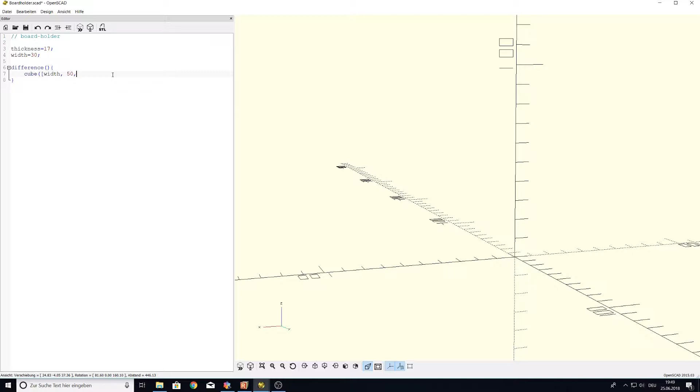We want it to have width of 3 centimeters. We'll make it 5 centimeters deep and 8 centimeters high. We hit F5 and then we already get the preview.

Now what we want is we want to cut out the skateboard, as I told you already. Therefore I measured it and it's approximately 50 centimeters long, 15 centimeters wide, and has a thickness of 1.7 centimeters.

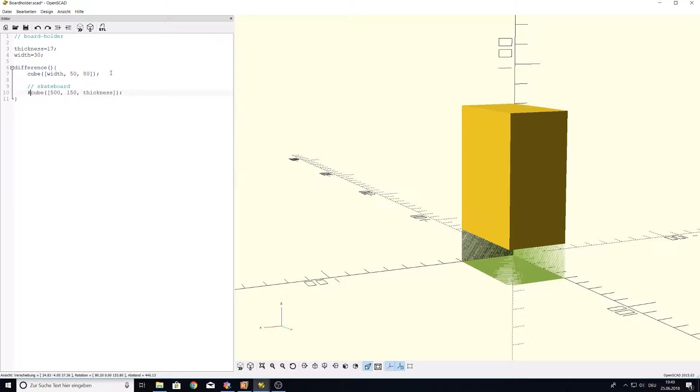Now for visualizing this, since we are subtracting this cube from the first cube, we won't see it except where it cuts out. So for visualizing the whole thing, we can just put this hashtag in front of it, hit F5, and then we get it rendered as a transparent red cube.

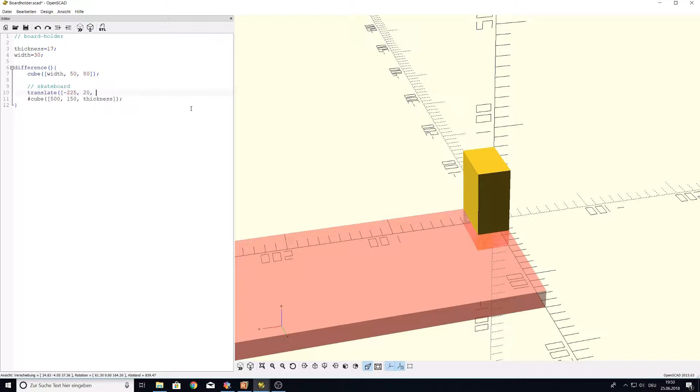Now we want to translate this cube to the position where we want this cavity to be cut out. So now we have these numbers, and as you can see, this would already make a pretty nice holder. I can disable the visualization now and we see the cutout and how this part would look like.

But that's not what I have in mind. I also want this cavity to point slightly upwards, like 20 degrees. That's it, so it'll be held down by gravity if I wedge it in there. And this already looks pretty nice.

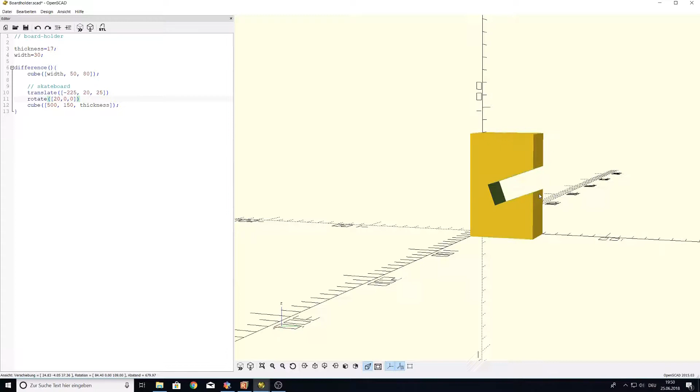Now all that's left to do is just cut out the holes for the screws. We'll use 2 bigger holes for a screwdriver. And we'll start by defining a cylinder with a radius of 8 millimeters, let's say.

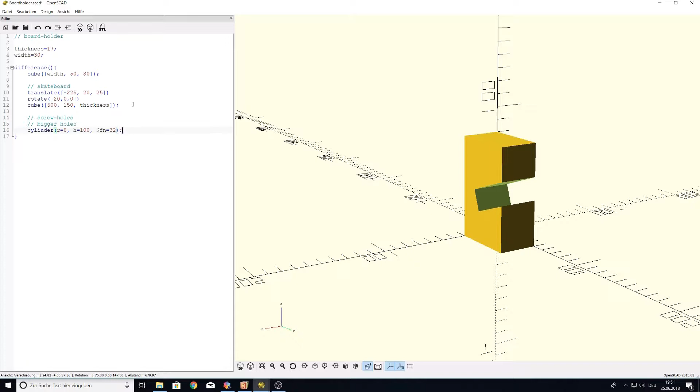Give it a height of 100 and use 32 sides. Again, we make it visible. It's oriented this way, we just rotate it around the x-axis.

Bang, now it lies flat. And we can see its 0 point is also the 0 point in the coordinate system. So it's pretty easy for us to translate this whole thing to our liking.

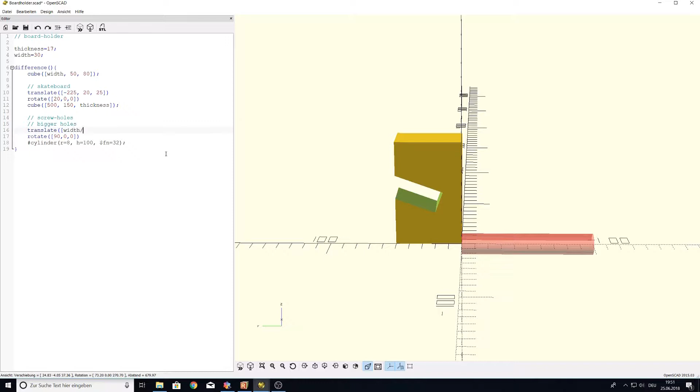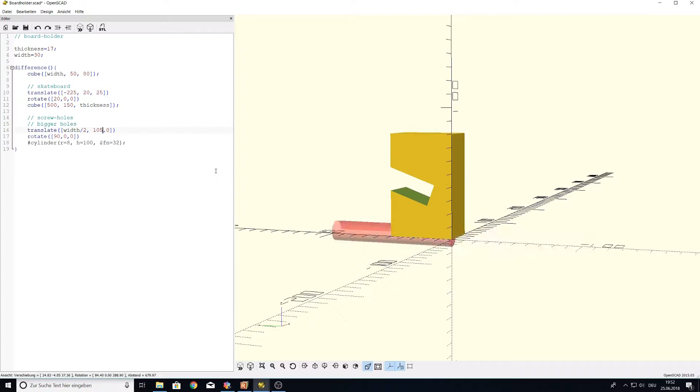We'll translate it along the x-axis width half, which results in it being centered in our piece. Then along the y-axis we'll give it 105 millimeters, so we have 5 millimeters of the part left behind it where our screw can go through.

And let's translate it around the z-axis. Bang. And we can disable the visualization. That looks nice.

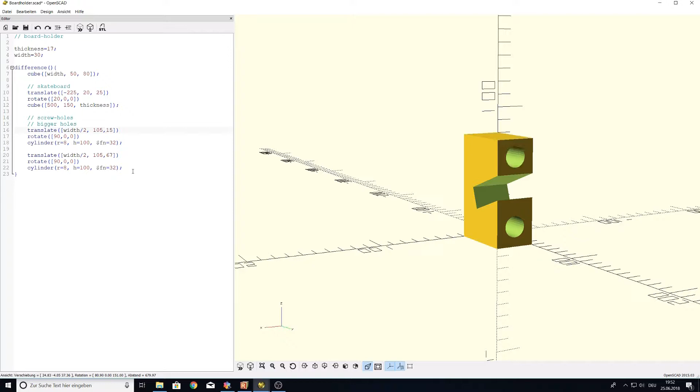It doesn't cut in here, there's still some millimeters left, so we just copy it, because I also want one in the top. Bang, and here we have our two bigger holes for the screwdriver.

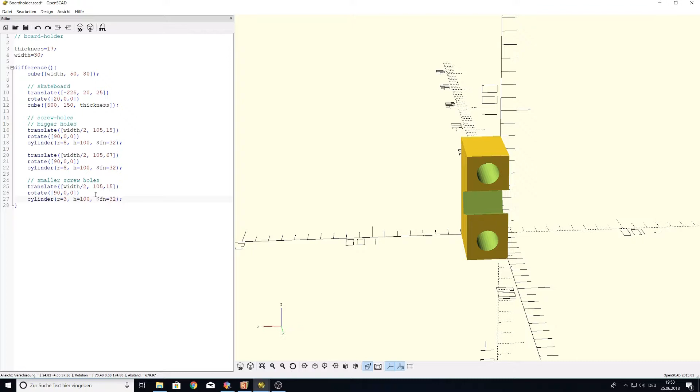Now we want the smaller screw holes. We can just copy everything from above and just change the numbers up a little slightly. We want a radius of 3, and instead of 105 we just translate it by 99. I'll show you why.

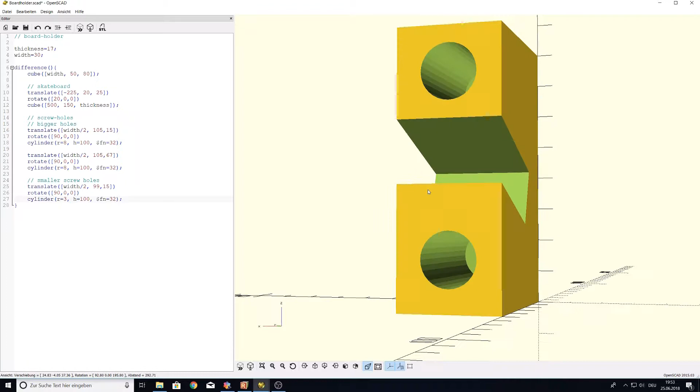By just translating it 99 millimeters to the left, we still have 1 millimeter sticking out, which makes a clean cut through the surface, and we have our screw hole, which looks like this from the other side, and we have 5 millimeters of the part left in here, which should make for a pretty solid surface.

And again, copy the second hole, change the radius, change the translation, and there we go.

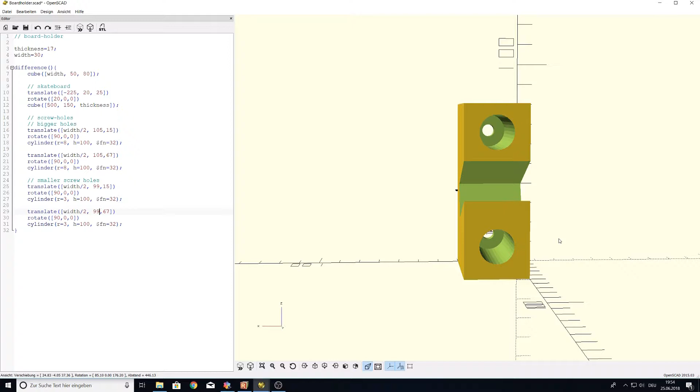Now in between all of these changes I made in the code, I always hit F5 to just give it a quick render, and if you're ready to export it, you hit F6 once, which will give it a final rendering pass, and then you can just export it as STL. We'll export this as board holder single STL, and we can open this file in any slicer. I'll use Repetier.

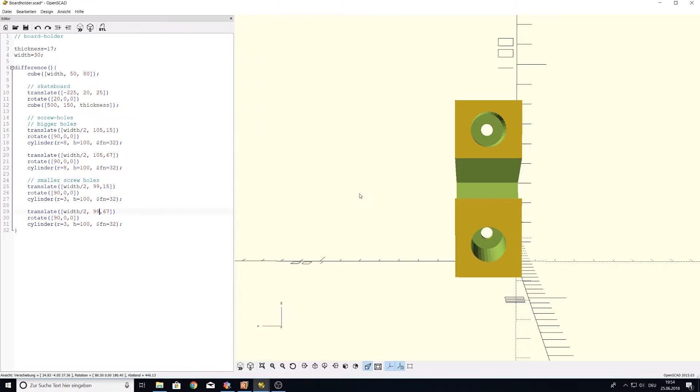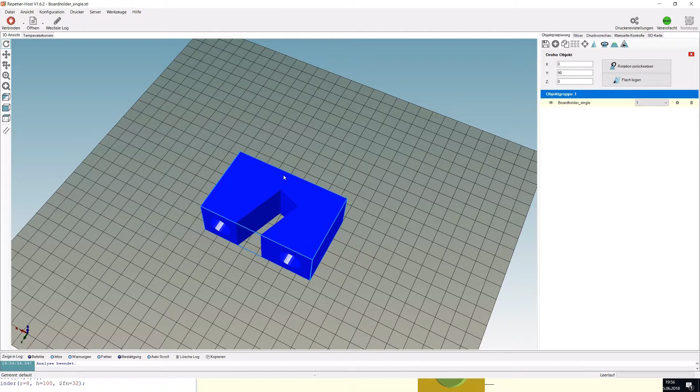Okay, I loaded our part in Repetier-Host. It still looks the same. Now we just rotate it on this side, because all these layers will be along the gravity direction later on, this direction, which is now X, so they will have the most strength along this direction.

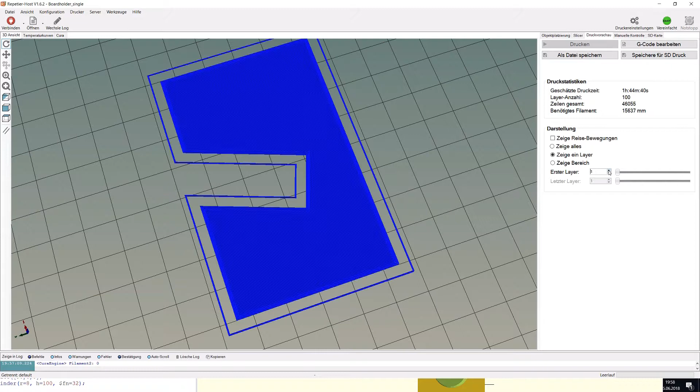For this slice I wanted 3 outer layers, an infill of 20%, as you can see here, and you can do this in the printing structures settings. I used 1.2 millimeters for the hull thickness, 0.9 millimeters for bottom and top thickness, and 15% infill overlap, which results in this. So the top and bottom thickness of 0.9 gives me 3 solid layers in the bottom and in the top, and in between it fills with 20% infill.

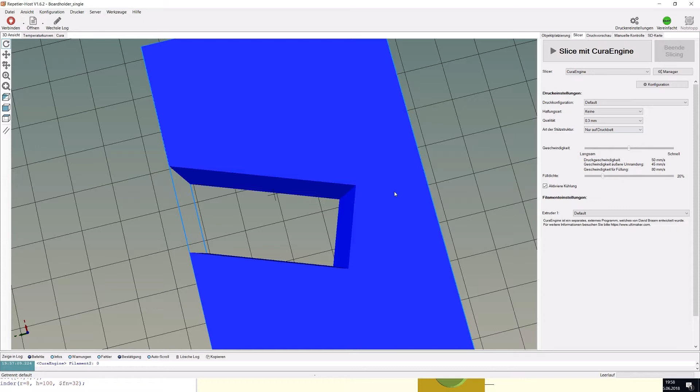Just what we wanted. And always remember, kids, it's not the infill that gives you the most strength in your part, but the number of outer layers that you have. So for this project I'm estimating that 3 outer layers in this size of a cube and 20% infill should be more than enough to hold these boards when they are wedged in here.

Alright, let's put it on the printer.

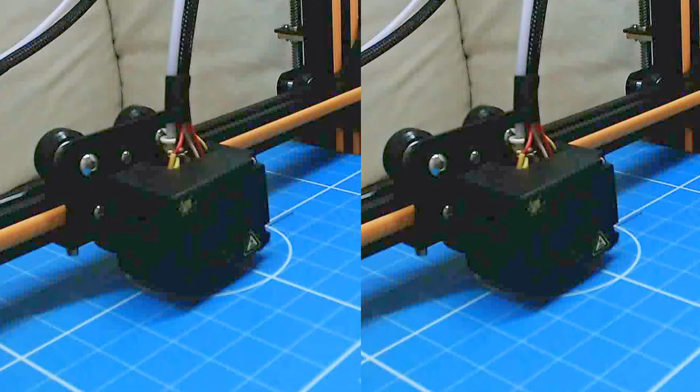Doesn't this look awesome? I printed those two in PLA since they'll be mounted in the hallway. PLA has enough strength to hold these boards, and there'll be no weather and no UV light, so we should be good for a long time.

Now let's drill some holes and get these mounted.

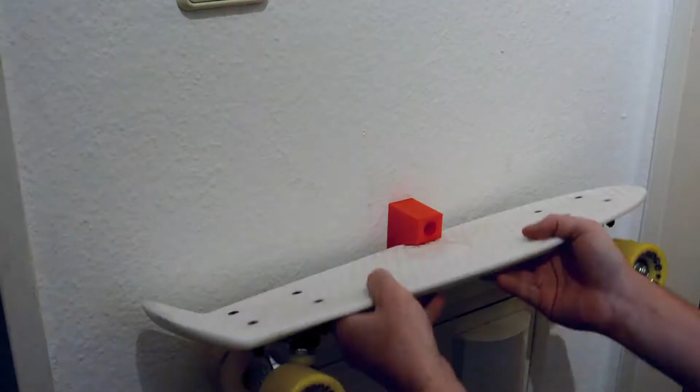So as you can see, everything went according to plan on the first try, which really scares me, so I probably hit some electrical pipe or something that will explode when I'm sleeping or whatever. But yeah, back to topic.

I can take the skateboard out easily, go take a ride, come home and put it back in here and everything's fine. Now in the next scene I'll show you how you can mount the camera to your skateboard.

Alright, camera on the skateboard for some epic ego view shots. Now you could of course just drill a hole in this, put a screw in there, some camera mount screw or whatever. You could also 3D print it.

There are some fixtures for longboards I've seen, or you could just glue something on there. But I don't like all of these solutions because either they're permanent and you have something in the way, and if you want to ride freely, that's a no-go. If you just put a screw in there, it might fall out, become loose, whatever.

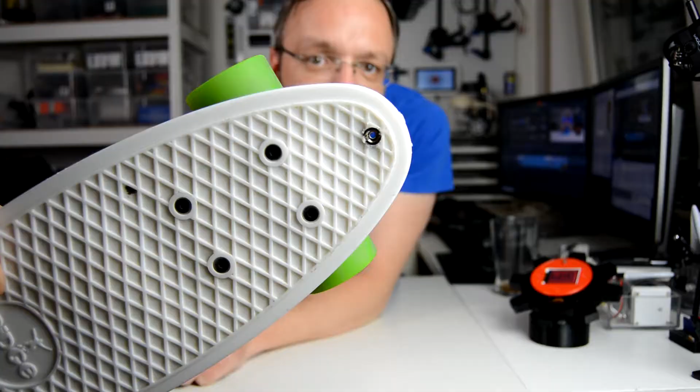So instead I chose to put this little fella in here. This one has an outer thread which is 3/8 and an inner thread of 1/4 inch, I guess is the unit. Regular camera screws basically. This is made of metal, which is quite important because I'll melt these in. We are working with the plastic board after all, which is kind of cool.

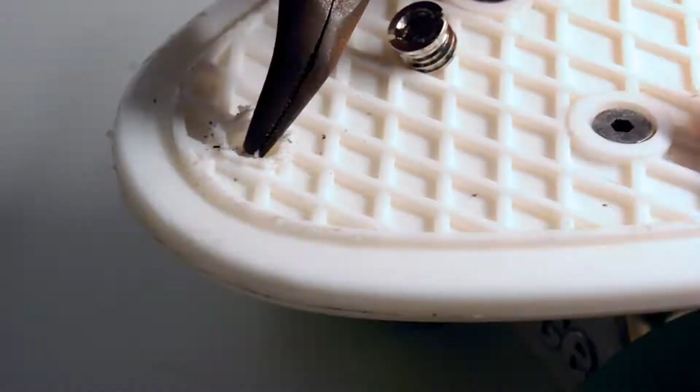After that, I just put an adapter in there which has a quarter thread on one side, quarter thread on the other side, quarter screw, camera thread.

Afterwards you can either directly screw your action cam. Nearly all of these have this camera thread. You can either screw it on directly, which fits perfectly. Or if you want some more freedom to compose your shots, you can also get one of these little ball heads.

And screw that on here. Screw the little cam on top. Fix everything up and you're good to go.

You can film this way, upwards, downwards, left, right, whatever you want. And I'm pretty sure that this ball head would even hold a DSLR, although I wouldn't skate with that on there. Or any other GoPro accessories or camera accessories, because all of them are pretty standardized and nearly all of them take these 1/4 screws.